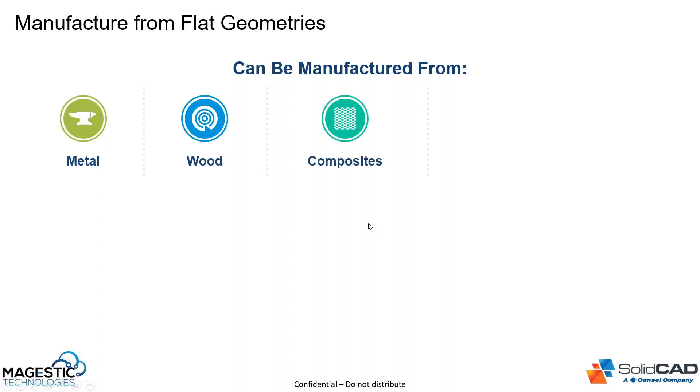All systems through the entire design and manufacturing workflow. So some of that includes the materials that we manufacture from, materials like metal, wood, composites, leather, also grating, honeycomb core, plastic, foam materials, any kind of bar extrusions, thick or thin. It really doesn't matter whether you're doing light gauge, stainless, or thick gauge materials. We can optimize the program for each of those processes and the machine tools that run them.

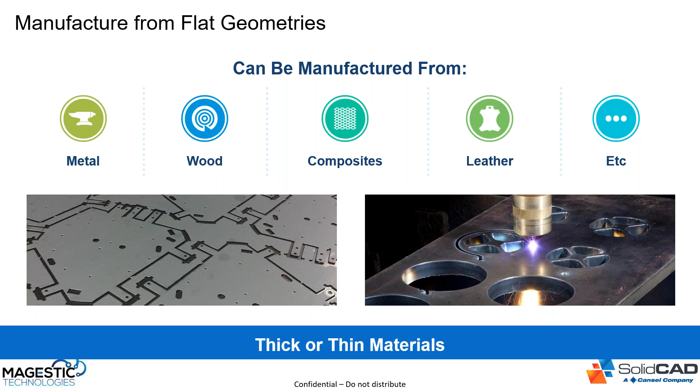For example, in general, we can program for contour cutting machines as well as multi-tool cutting processing machines. So for contour cutting, we have lasers, water jets, plasmas, oxyfuels, multi-tool cutting, punch press routers, and combinations of those, punch laser, punch routers. We write all of our own post-processors for TruNest at Magestic Technologies, so we can support whatever machine that you're running there.

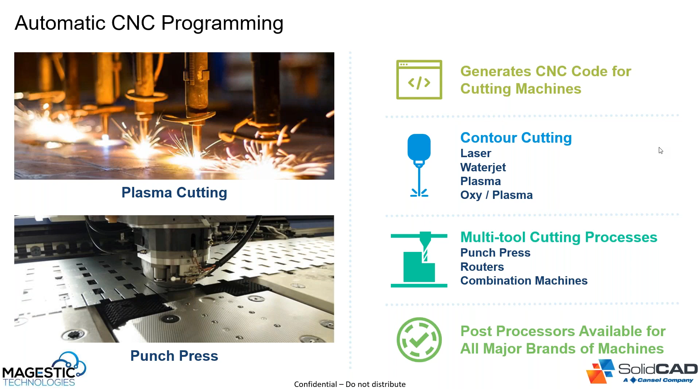So in general, TruNest as a workflow is really at the center of the design to manufacturing process. First off, we have the design integration into TruNest.

Whether that's native CAD data like AutoCAD or Inventor, or generic CAD data like DXF or DWG files, or even legacy NC data, we can bring those all into TruNest via our any-CAD translation options within the software. We can even integrate with PLM and PDM systems like Vault or others if you have something outside of the Autodesk portfolio, and bring them directly into TruNest.

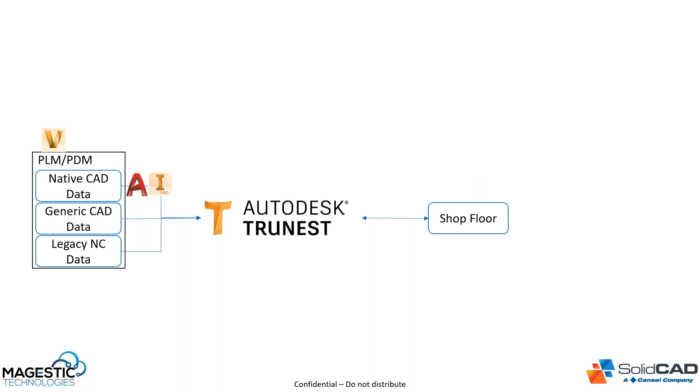So we take that design, bring it into TruNest, and get that to the shop floor as quickly as possible. We can run all your different machines, whether you have lasers, punch presses, plasmas, or water jets.

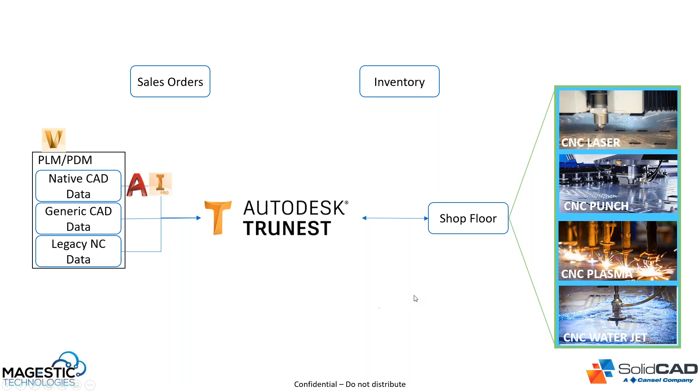We do that by integrating both orders and inventory within the system in order to drive production on the shop floor, all the while generating reports and outputs to sync back into whether you have an MRP or ERP system, shop travelers on the floor, or whatever reporting mechanisms you're using. You can go through this entire process.

At a higher level, TruNest connects to a database architecture. So when you start to get into things like ERP and MRP, we can directly integrate those systems and start to drive your sales orders through the inputs to TruNest, your inventory tracking from the shop floor, and manage what's consumed versus what's remnants throughout the entire system.

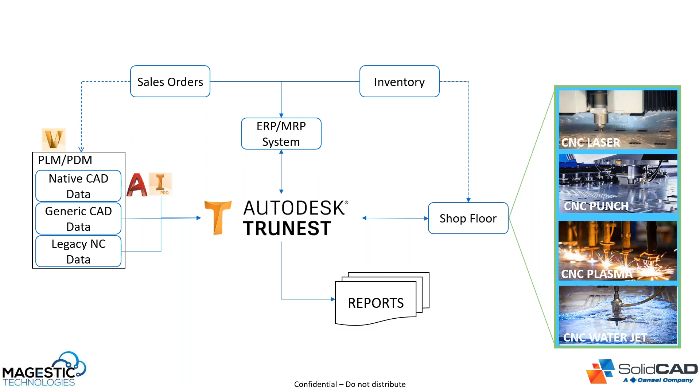So with that, I'd like to take you through TruNest and show off some of the functionality within the product. Let me switch over here. Just give me one second.

As I bring up TruNest here, the first thing we come to is an authentication screen. TruNest requires you to log in with a username and password. The reason for that is we like to track and have traceability over what users are doing within the software, so we can understand what orders are being created by what users, what parts are being brought into the system, as well as apply certain workflows to certain user levels. As an administrator, which is what I'll log in as here, I'll get full access to all the different workflows within TruNest by default.

As I log in, it's going to ask me which workflow I want to log into, whether that's some of the defaults here between admin, engineering, or shop floor. I'm going to click on the admin one and log in, and we'll see TruNest come up. That workflow is represented by the functions I have up here inside of the ribbon.

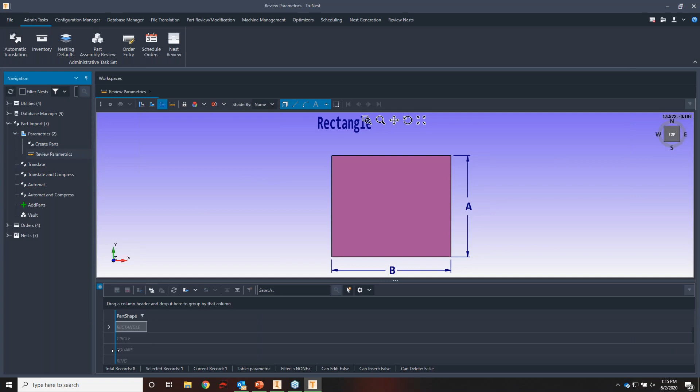There's just some basic parametrics within TruNest that allows you to create parts on the fly. Whether you're looking at things like creating a square, circle, or rectangle, some basic shapes, you can just input some basic parameters about what that geometry is and generate those shapes on the fly. That'll save you some time from the design work if you needed some parts quickly.

The next process is what we call translate. A translate is a geometry translation - it translates your CAD files into what we call an MSI format, which stores all the information we need about that design and manufacturing data from that CAD file. That's just a raw geometry translation, so any metadata like material information isn't brought in at that step.

That step is done through our automat option. With our automat option, we can both translate geometry and metadata information in that CAD file. So if I'm working with Inventor data, since we have that integration with TruNest, I can access things like the bill of materials and find out what materials I'm using for each one of those parts, what the thicknesses are, what the assembly, sub-assembly structure is, any other specific or custom properties or information that I want to pull out of that model. I can gain access to that with an automatic translation option.

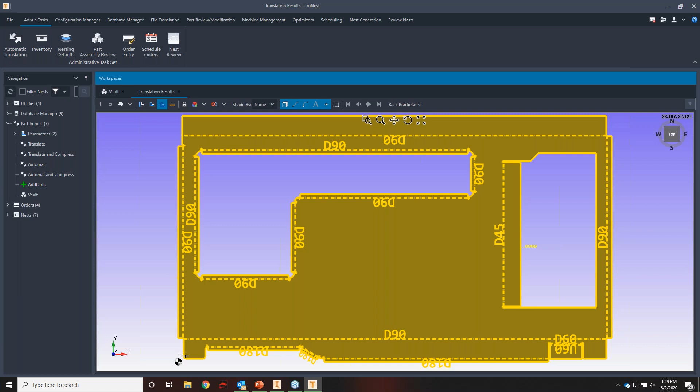Specifically in this case, we are after the sheet metal components. Since we're using sheet metal fabrication for a laser machine, we are setting the flag within this translation process to skip any kind of standard screws or bolts or things like that, and really just investigate the sheet metal components. So it'll automatically filter those components that you don't want in that assembly, and bring in the stuff that you do want.

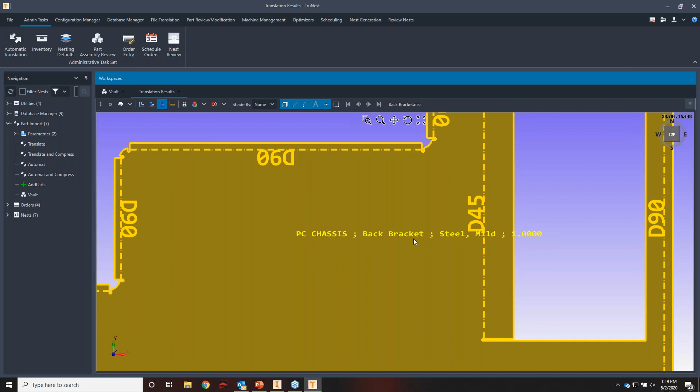So we can see here that I have the parts. I'm bringing in bend line information as well as this metadata. You can see right here in the middle of the part the information about what the assembly is, what the individual part name is, what material it was, as well as the thickness.

You can also see different colors on the shape. During this translation process, it's automatically coloring geometry based on quality settings for the laser. So if I've got really small shapes that I want fine accuracy on, TruNest will automatically colorize those shapes so the laser quality is represented based on your tooling requirements. In this case, it's using a medium quality for some internal shapes and a lesser quality towards the outside periphery.

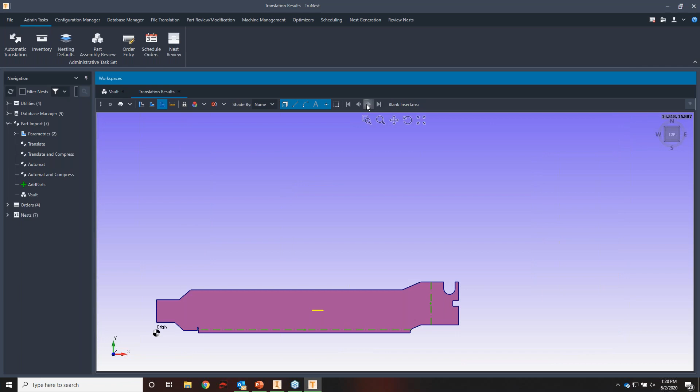So you can go through and see all the different components that were brought into my assembly, all the different bend line information and metadata that was here, and make sure everything looks okay as far as my design goes.

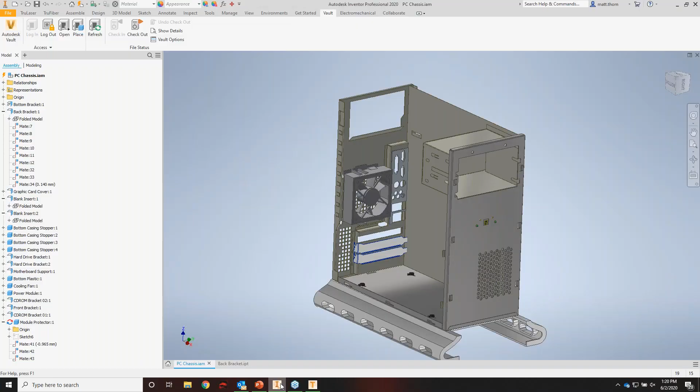Now, if there was a change that I wanted to make, let's take a look at this first part again. So this bend line here is bent down at 45 degrees. I noticed in my design history that this should actually be a 90-degree bend, not a 45-degree bend. So let's go back to Inventor. We can see that here. That looks a little bit off being 45 degrees. It should really be that 90-degree bend.

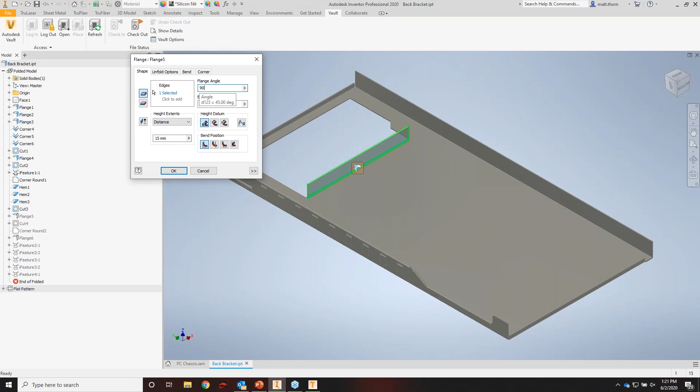So I can open up that component, and what I can do is take a look at that particular bend. We can edit this feature and say, okay, let's bring that back to 90. It's going to ask me to check it out. I want to check that out from my vault so I can save that design. Okay, now it's at that 90-degree bend. I'll check that back in.

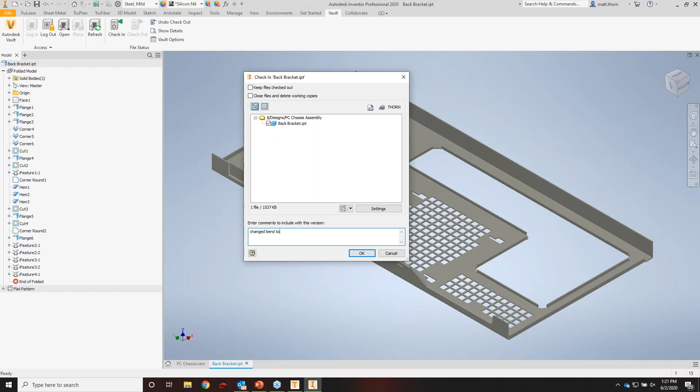It's going to save it for me. I can give a comment: change bend to 90 degrees. And just say OK. So now that's back into Vault with that new version of that particular assembly.

And all I need to do is come back into here. We'll go ahead and just re-download that particular assembly from Vault to get the latest version of that part file. We'll go through this translation process again, pull out that file, and we should see that bend information update on that particular file that we changed.

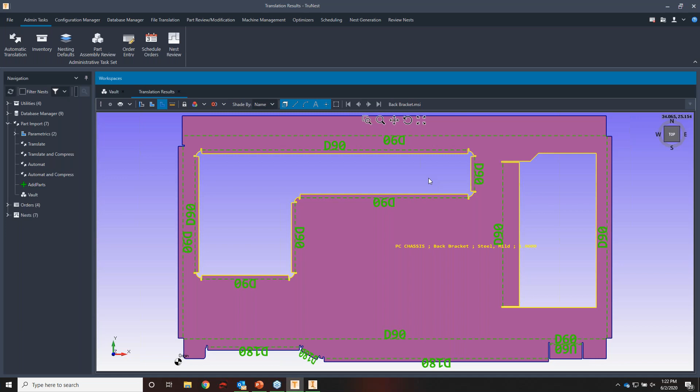We can see now it's telling us it's a 90-degree bend, which is what it should be. So at this point, I'm ready to move along in the process. Everything in the design is ready for manufacturing. I've got all my information here about the material and the parts. I'm ready to place an order.

So for this next step, I'm going to go to order entry inside of my orders node in the tree. This allows me to query all the parts that I have in the system and build this order for the schedule that I want. So I can start typing in. I know that the assembly is called the PC chassis, so I've got it here. If I didn't want to type the whole thing, or if there were a lot of things that started with PC, I can choose this autocomplete option and it will fill in the rest of the information for me. So now I've just filtered on the parts that I'm interested in to order.

Now I can assign things like a particular quantity, a particular due date that I want to schedule these for, and a priority for that order. So if this assembly needs to jump the queue to the front of the line, I can give that a high priority, and I'm going to see that first in my nest, so I can get that process on the machine and out to the next stages in its product life cycle.

I can give it a job order. So here's where we can sync back to things like ERP and MRP, driving different job orders and carrying that information throughout TruNest as well. And then we have things like material group, facility, and comments. For facility, I can actually use TruNest to integrate with multiple sites. So if I've got machines and materials on one site and another site, I can order all this together and have everything filtered down to the appropriate facilities afterwards, so that I'm maintaining that entire schedule across my company instead of just at a particular site.

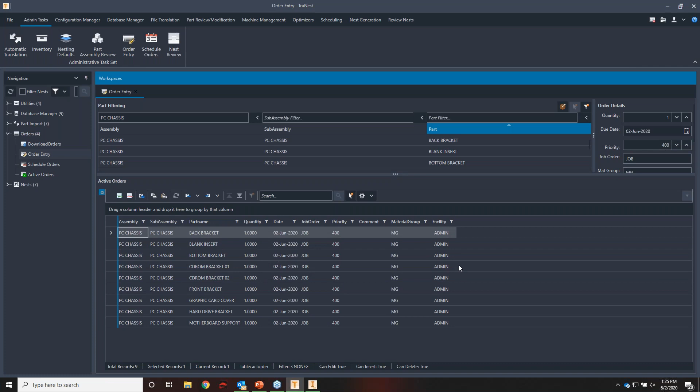So go ahead and add these orders, and they go into this table down here called my active orders. So I've got that particular assembly, and like I said, we can integrate with MRP/ERP systems to drive this process automatically from a schedule. I'll give you a preview of that.

I'll bring up another screen with that same order. At a basic level, I can import a file, like a CSV, directly into my order. So I've got this order that could have been driven or exported from an MRP or ERP system. I'll go ahead and open that up.

Now I've got all these different orders for this same PC chassis, but the job order could be different. So I've got the one I scheduled initially, but also jobs for Monday, Tuesday, and Wednesday in here as well, which have different dates associated to them.

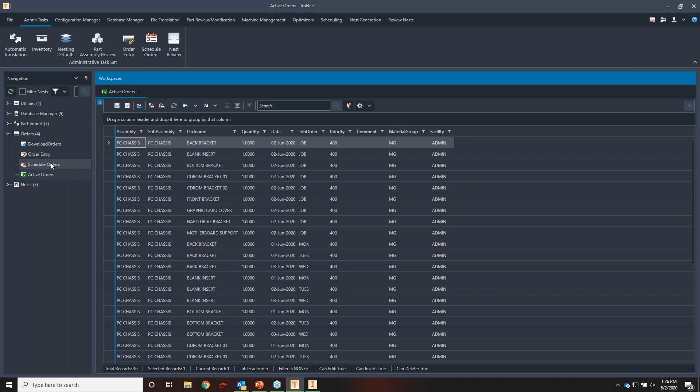So now I've got this huge list of orders. What I can do is go into my schedule order screen, and it's going to give me a bird's eye view of everything that I have in the system.

In this particular order, I've got 4 different jobs - the one I placed plus Monday, Tuesday, and Wednesday. We have this material, with some parts on this aluminum material and other parts on this steel material. So I've got 3 unique parts on that material and 16 pieces, and 6 unique parts on this material and 28 pieces.

Altogether, I've got all my parts, pieces, and materials here, but I also have options as far as the equipment I want to run this on. This material can actually be run on a laser and a water jet, and this material can be run on a laser and a plasma.

In this case, I want to run everything on the laser, so I'm going to select those two and push them forward in the process.

In this table down below, we actually have everything that's in the system already, so this is a current snapshot of what production looks like. I've got things in different statuses - whether it's ready to be nested, whether it's been nested and needs to be sent to the shop, or whether it's been cut on the shop floor. I can see which machines it's currently being scheduled on, as well as the current amount of time and material that's currently scheduled on that machine.

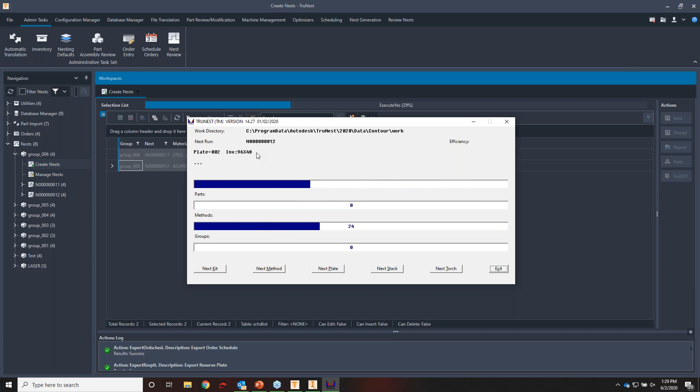So it's going to go through, it's on to the second material now. Again, this material has the same inventory sizes, 120 by 60, and it's going through and nesting all that. At this point, it's also creating all the reports I mentioned earlier about the nesting efficiencies and the parts that were on each plate.

Additionally, we run optimizations on each plate for the process and material type currently nested. In this case, it's automatically running a tabbing routine, placing tabs on each shape to hold it to that material based on a set of rules. It's also doing what we call head-down logic and sheet cutting.

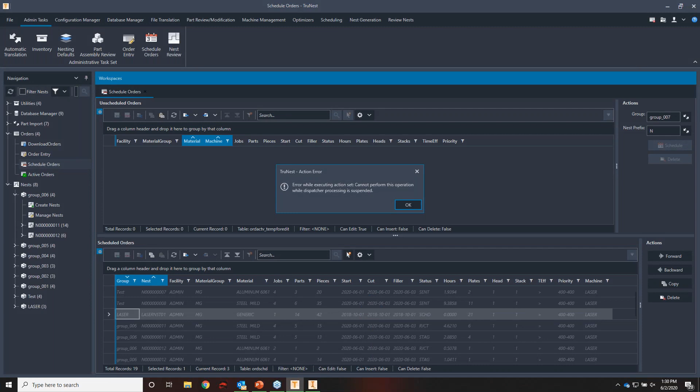Head-down logic is a process where we try to minimize the number of times we have to pick up and move the head by optimally moving from sheet to sheet. Then we do sheet cutting, which processes the sheet itself into smaller, more manageable pieces of that skeleton to better safely remove it from the machine bed. After all that happens, we run our post-processor, which generates CNC code for each plate based on all those optimal processes.

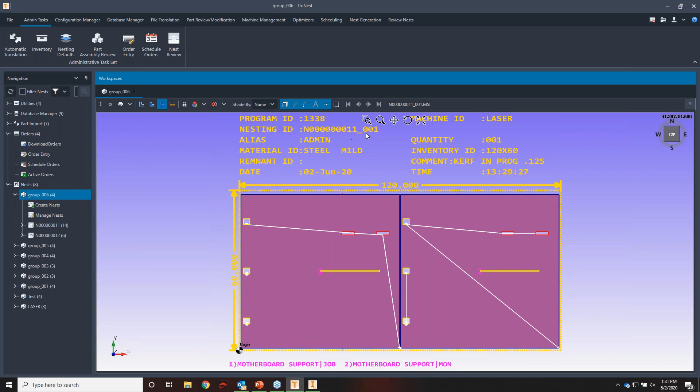So we can see the results here. All of the white lines going from point to point are that head-down logic, showing some of that off-part motion we're doing after cutting a shape and going to cut successive shapes without traversing over any pre-cut parts. We don't have to worry about crashing the tip of the machine head with material on the bed.

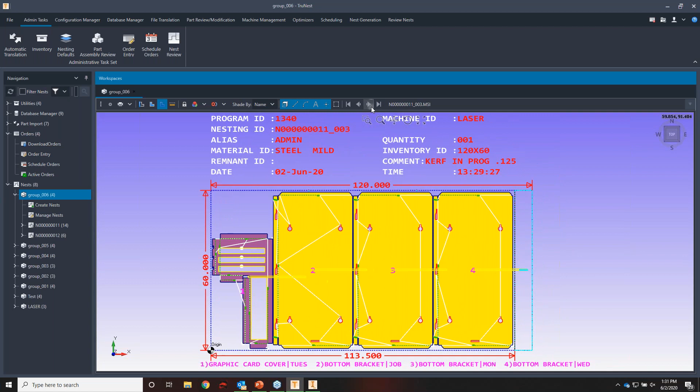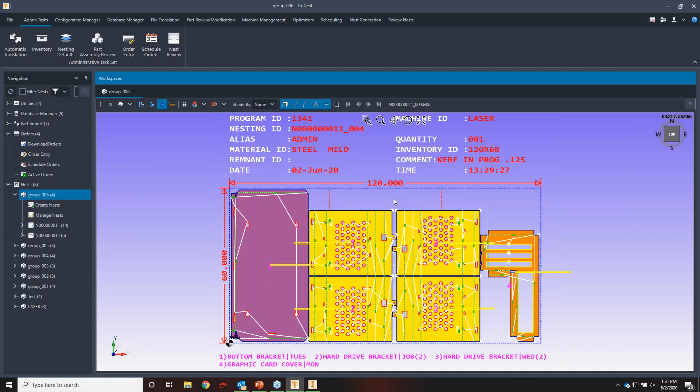You can go through and look at the results for this. You can see all the different colorizations for the different qualities of a laser. We have all of our etch lines for the bend lines for the machine as well. We can kind of go through—we see these red lines. These red lines are the sheet cut operation, cutting up this skeleton into smaller pieces so that I can manage it easier.

And we can see some of the results that we have here. Everything looks good with that. So we generated our nest, and everything looks good inside of our nest.

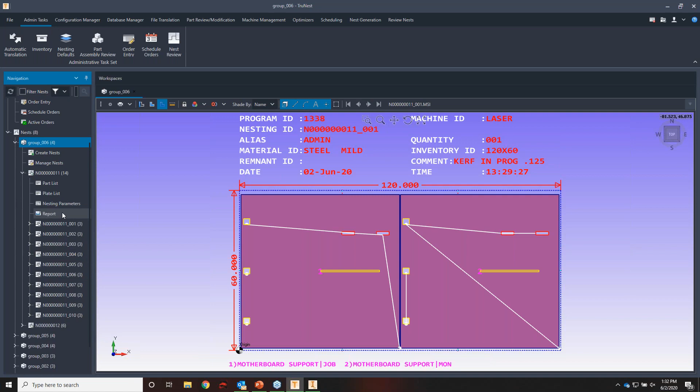We can take a look at things like each individual plate if we wanted to, and we can take a look at the overall nesting report. So if I wanted to see information about each particular piece and each particular nest, I can see that here. It's going to give me a lot of details on each one of the plates that I have.

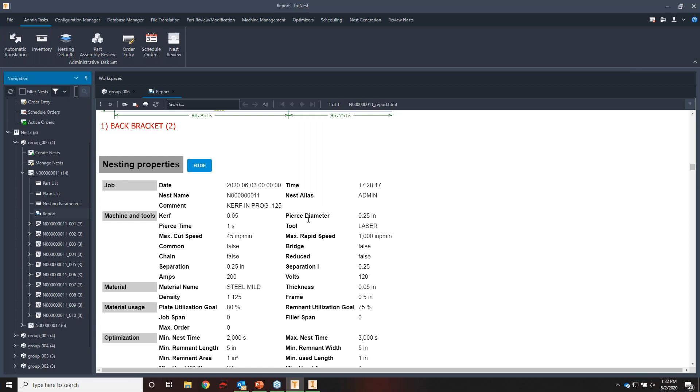So I can go through and see what properties were used—things like the kerf value on my machine, the separation I use between parts, the goals for my efficiency, any grain constraints that were used, whether I can rotate parts at certain angles, as well as all the piece information, so I can see what part was on what job and which plate it ended up on, what grain constraints were on that particular part, whether that part was mirrored, and the priority of those things. So I can see all that information within the nesting report.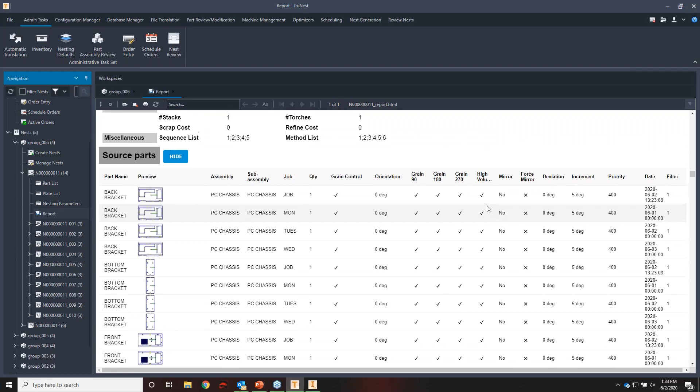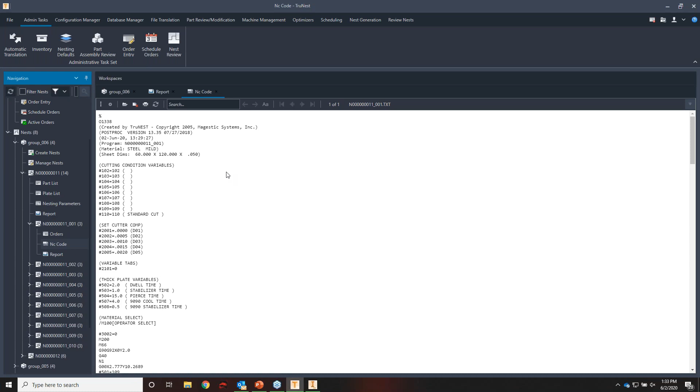And if I dial down into each plate, I can go ahead and see the NC code for each plate. So I can investigate anything I want about the NC code, see all the processes here, and make sure everything looks okay.

I also have under this group a Manage Nests node inside of the tree, and this is again going to give me a snapshot of all the materials and all the plates that were generated from that nesting process. We can see things like the efficiency right from here of that plate, whether we met our efficiency goal, which gives me the stage status, or whether it's rejected because I didn't meet that efficiency goal.

Which allows me to do things like, if I didn't meet my efficiency goal—let's see, we've got some 67% here, maybe that's too low for me—I can put the parts that were on that plate back into that scheduler queue in order for more parts of like materials to aggregate within that scheduling system and then be nested together again to hopefully gain some more efficiencies on those things.

As a final process, I'm going to send all these particular plates and NC code down to the machine tool. So I'll click that send operation, which will gather up all that information and send it down to the machine in either a folder or however it gets delivered to that equipment. It's going to change my status to sent down to the machine, so this tells me that as a nester, I'm done my operation. Now I've got to wait for feedback from the shop to let me know those plates have been processed.

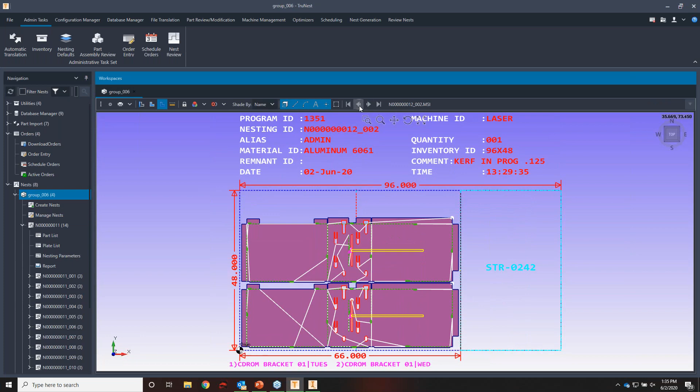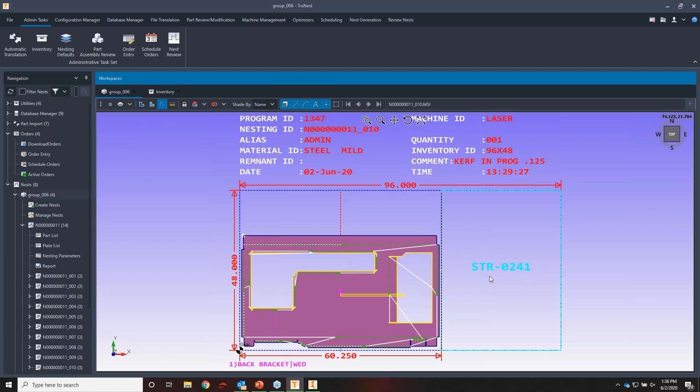We can also take a look here. If we look at some of the plates towards the end of the process, we'll see some were generated with what's called a remnant code. Based on settings within the nesting software, if the remaining material is large enough to store back into inventory, it will update inventory with that. So if we go to our inventory, we can see that STR0241 actually made it back in, with updated length and width, ready for me to use on the next run of material. So we can track remnants through the system and use them later to gain efficiencies in material usage.

Lastly, one of the things we can do from this workspace is export a DXF of the nest if I wanted that geometry for some other process, or if my machine runs on a DXF file, I can directly output that as well. I can also output PDF files of the nest plate.

I can review the NC code, and I can do things like a backplot of that particular NC code. A backplot is a reinterpretation of the direct NC file to show me exactly what's going to happen on the machine. This lets me see what shape's going to be cut first, second, third — all the sequencing. It also shows all the cut lines for the sheet cut, and my lead in and lead out settings for each of the internal and external shapes.

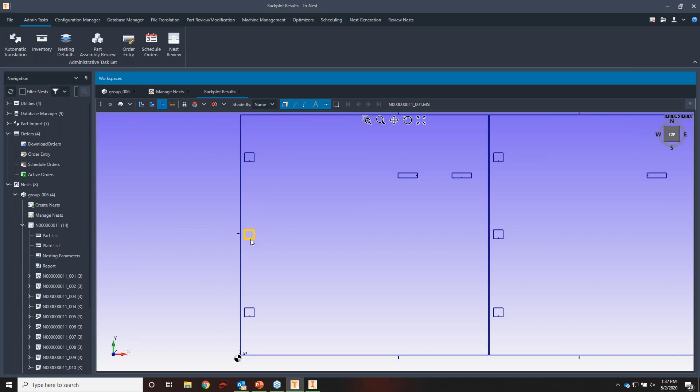We can investigate the information we have here, make sure everything looks fine before we go out and run it on the machine. You can also see some of the tabbing that was automatically generated on each of the parts, which leaves the part stuck to the sheet for easier processing within that backplot.

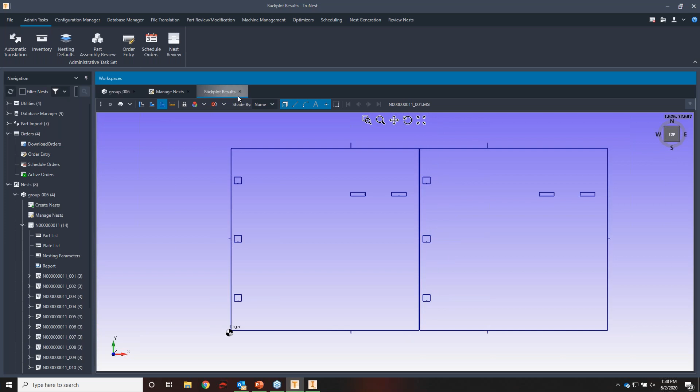So just to summarize, we went through and brought our parts in from Vault directly within TruNest, with all that information associated to it. We created our order, scheduled that order, created our nest, ran all our different optimizations on that nest, and then sent it down to the shop. That's a typical workflow within TruNest from day to day, and you can set this up to run just in time, or schedule production weeks ahead of time. The system really allows you to do all that to your preference.

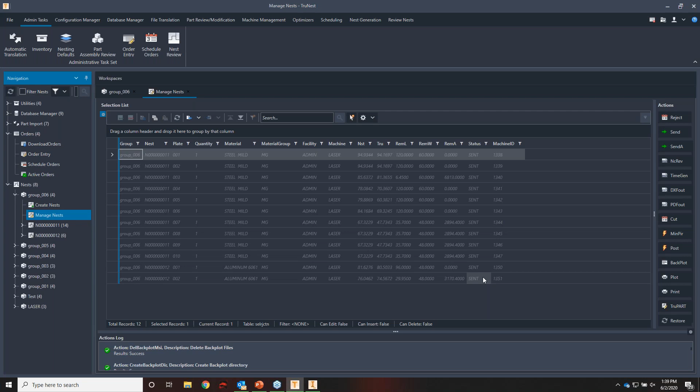That's a great question. Let me just pop back into TruNest. Sorry for switching around. Each one of these statuses, as I mentioned during the demonstration, does trigger some sort of event within the software. It's really telling you, as a user, where everything is and what process it's in, but it's also triggering things like materials entering back into inventory. So when I did this sent process, it actually updated the inventory for the remnants that needed to get back into inventory.

We do that on the sent process in this case, because at that point the users have validated everything. They don't want to run any more tests, they want to send it and cut it on the shop floor. So you can really trigger things based off these statuses. We have all these different workflow events within the software and do some automated tasks based on those and based on the status. That's a great question.

Okay, we got another question from Joseph, a little unclear, but I'll try to read it out. What if you have a cut-to-length line that lets you cut variable sheet lengths? Would you have to create each size? So I think what Joe's explaining here is he's got stuff that's cut to size. So instead of stock sheet sizes, like for inventory, here I've just got some inventory 120 by 60.

You can certainly run TruNest in a mode where it will drive your sheet cutting line as well. We've got some customers actually doing this, they call it a blanking system. Essentially what happens is we pre-nest everything within the software for them so that they know exactly what their sheet lengths need to be based on constraints like frame around each part, trims on the material, things like that. Then we send that information to that line so they can say, okay, this particular sheet is going to be 41.25 inches, this particular sheet is going to be 46, all that stuff, and automatically generate those processes based on those material sizes instead of the stock sizes.

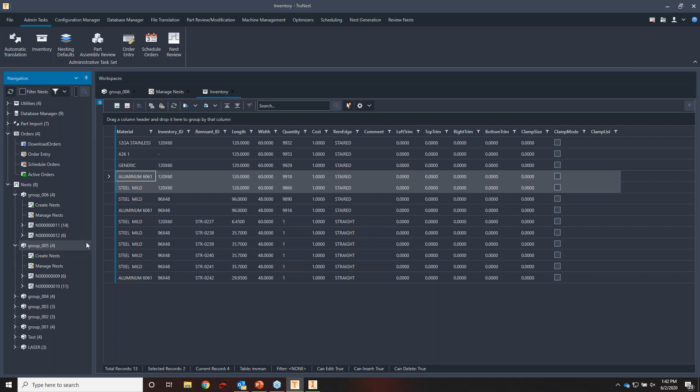Can you explain common line cutting? Good question. So common line cutting is a process where we're sharing geometry between two like parts. So if we go into some of the examples that I have already in the system, we'll take it and look at the same parts, but in a common line situation. Common line nesting ignores separation values between parts because we want to put those parts close enough together that they share a particular segment.

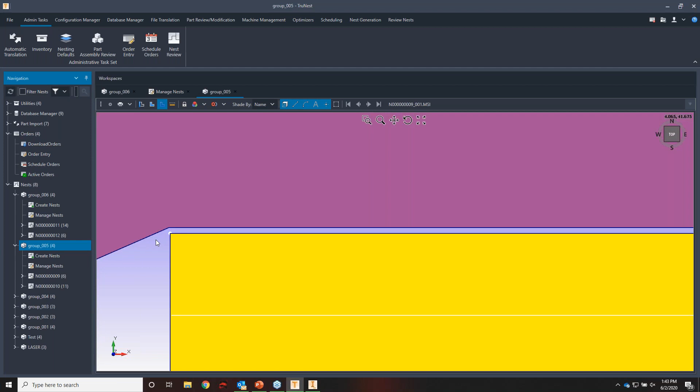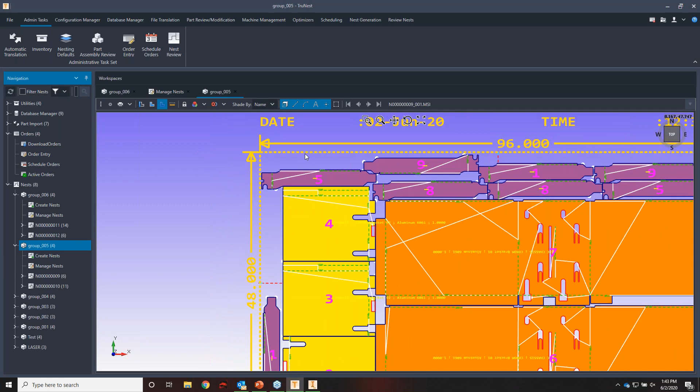So what happens during the nesting process is those parts are spaced by the kerf width of the machine tool for that material. That allows us to cut this particular segment one time instead of having to process both segments of each individual shape. So it's a very special nesting process, and we have unique optimization routines for the tabbing as well as the head down logic and things like that for common line cutting. You can see some of those examples here where we're sharing some of those segments between parts.

Excellent, okay, I have another question. Can you change quantity of parts, material size, machine tool just before cutting if conditions on the shop floor change? That's a great question. So if, for instance, you set this particular schedule up, all these nests, all these materials up, weeks in advance, or however you're running your production, and something changes.

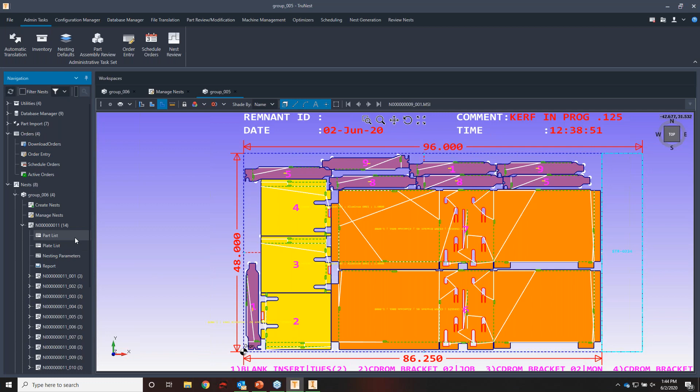Maybe I need one more of this particular part, or maybe some of my nesting constraints change. I can actually change them underneath each nest run. So I have a list of nesting parameters, plate parameters, and part parameters within each nest run. And all this information is taken from the database of defaults within TruNest.

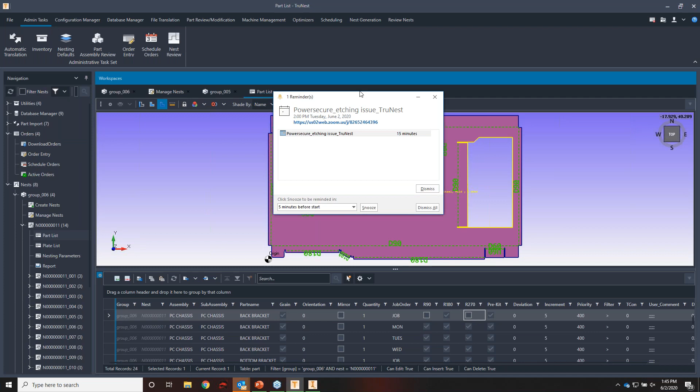So things like the inventory table, which I showed before, is a list of defaults that populate some of these kind of just-in-time views that we're looking for. So I can actually modify some of these defaults on the fly for this job, without modifying the default value. So if in this case I really don't want this part to nest at 90 and 270 degrees, I can make that change on the fly, and I don't have to do anything else within TruNest or mess with the default value, anything like that for that information.

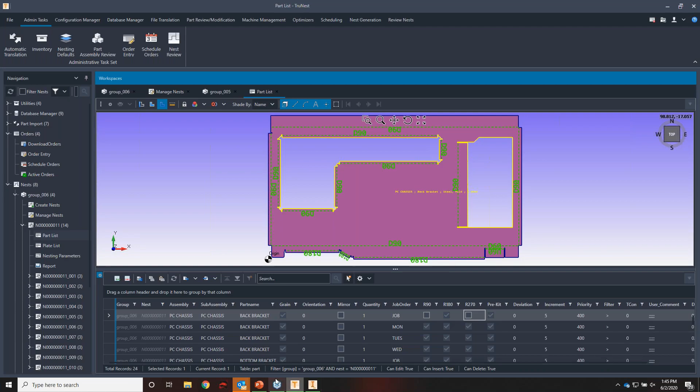Can TruNest ensure parts are manufacturable? That's also a great question. During the translation process, when I bring parts into the system, we saw some dialog boxes come up. What it's doing is pre-validating those shapes for the machine tool and process you're using. That colorization I mentioned for the different laser qualities works the same way: if a particular piece of geometry couldn't be manufactured, or if the shape was open, not closed, or not connected properly, TruNest will warn the user that some part files aren't suited for nesting or manufacturing. That gives the end user the ability to go back to design before creating the order or nest, fix those issues, and re-import the parts—just like I changed that bend line and design information and re-imported it directly into TruNest.